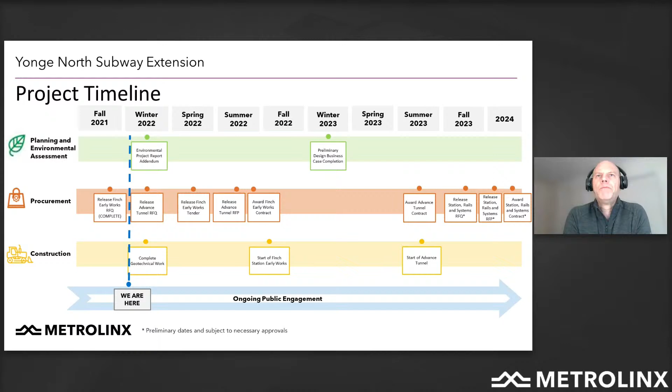Thank you, Stephen. First, just a recap of what an environmental assessment is, especially for those who weren't able to tune in to our first virtual open house or the second one last week. An environmental assessment is a process to identify environmental effects that a proposed project may have on the environment. We complete environmental assessments ahead of construction to identify potential effects and ways we can address them during and after construction, and we document all of this work in an environmental project report, or an addendum, as is the case for the Yonge North Subway Extension.

We've been working on our addendum for Yonge North Subway Extension for a number of months now, and we're very excited to have it available for public review. Please, I encourage you to review it. The addendum is available on our website along with comment submission forms. At the first open house, we presented an overview of the findings for all environmental topics. At the second one, we looked at the tunneled segment of the project, and today we'll take a closer look at a handful of topics for the surface segment assessment.

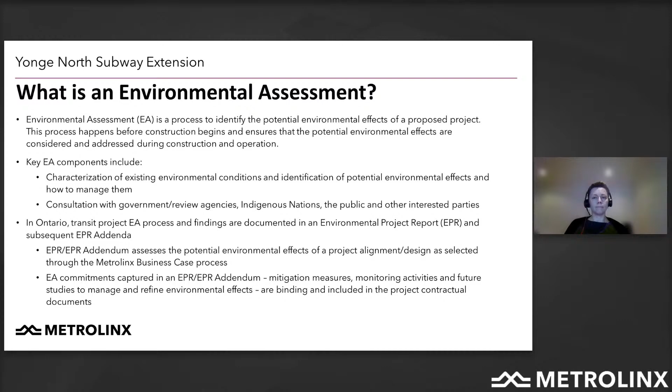Our addendum looked at all components of the segment, which include the surface tracks themselves, Bridge Station, associated bus facilities, High Tech Station, one traction power substation located at the train storage facility, and the train storage facility itself. For the next few slides, we'll touch on Bridge Station, High Tech Station, and the train storage facility.

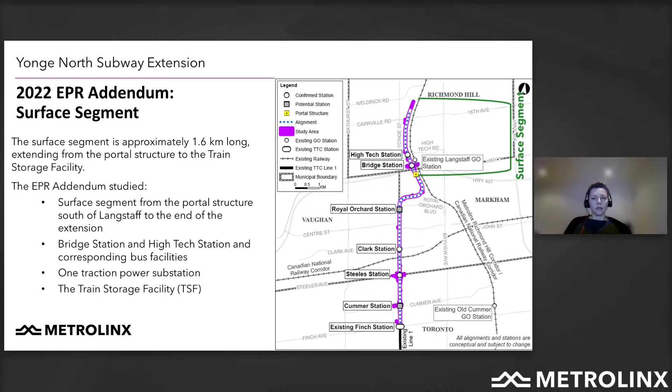Bridge Station is proposed to be located alongside the existing CN Rail corridor between Highway 407 and Highway 7. It will be a new transit hub that will open up new travel possibilities in York Region and beyond. The hub will bring convenient transit access to the Richmond Hill Centre and Langstaff Gateway development areas, which is expected to reduce traffic congestion as these communities grow.

You can see on the map, the hub will also offer fast and convenient transfers to five existing and future regional transit lines. These include Viva Yonge Street Rapidway, Viva Highway 7 Rapidway, Highway 407 GO, Richmond Hill GO, and the future Highway 407 Transitway. Bridge Station is also one of the main drivers behind the Yonge North Subway Extension business case. It's a very important element in creating the network effect by bringing together multiple transit lines to give riders more options and enable easy transfers.

I also want to point out the placement of the station between two highways. Locating it here enables transit development on lands that are currently underutilized, which at the same time means that the space the station and the hub would have occupied elsewhere can be used to support other non-transit uses and development.

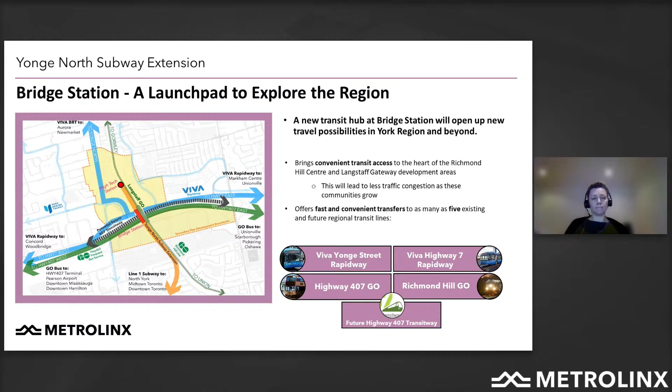High Tech Station is the last station along the Yonge North Subway Extension, and it will serve future communities envisioned within the Richmond Hill Center area, putting the subway within walking distance of an estimated 2,300 jobs and 5,500 people, more than half of the residents expected to live in this designated urban growth centre by 2041. The station will be built at surface, like the bridge station, located partially under the bridge along High Tech Road, which spans the CN Rail corridor.

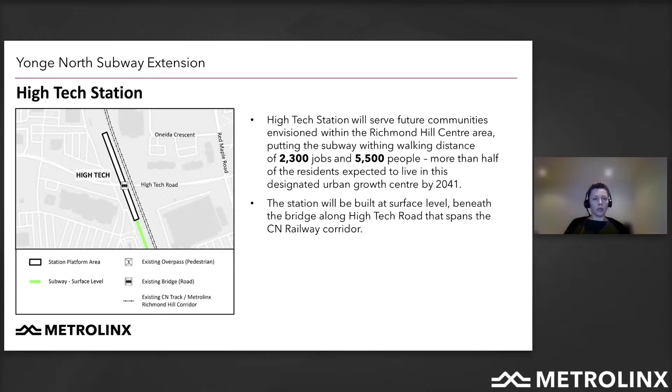Train storage facility for the Yonge North Subway Extension is proposed to be built partially alongside and within the existing CN Railway lands. Placing it at the surface is standard practice and is critical to stay within the $5.6 billion funding envelope for the project. Cities like Vancouver, Chicago, and New York all have ground-level train storage facilities that successfully integrate into surrounding areas and meet the needs of their respective transit networks.

This change brings the proposal in line with our local TTC's five subway train storage or maintenance facilities, which are all above ground.

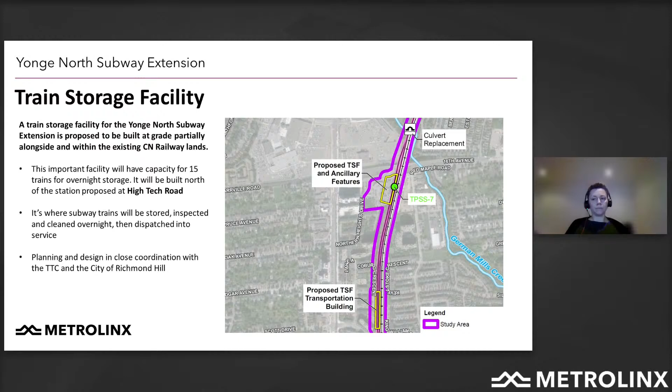Now switching gears to the addendum findings with respect to the surface segment. At tonight's open house, we will focus on noise and vibration, natural environment, and air quality, which are key areas of environmental management on Metrolinx projects, and we wanted to spend a bit of time discussing these for the surface segment.

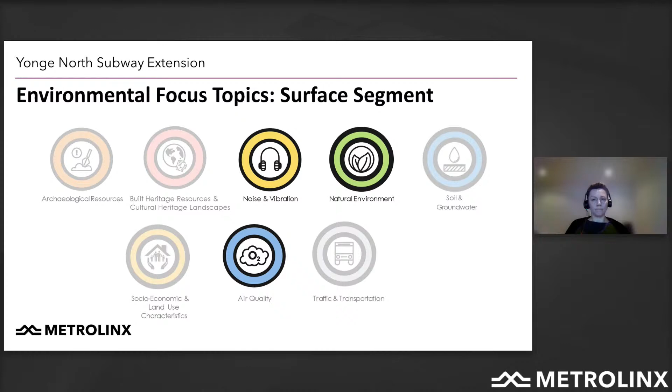Noise and vibration is up first, and for those who were not able to tune in to last week's virtual open house event, I just wanted to outline Metrolinx's general approach to noise and vibration management.

We start with the environmental assessment studies, which identify recommended mitigation and monitoring. These studies also outline noise and vibration limits that the project will adhere to. Together, these are binding commitments, which are then included in the project contract documents.

Detailed design is developed based on these commitments, and contractors also develop noise and vibration management plans based on these commitments, which Metrolinx then reviews and approves prior to construction start. During construction, noise and vibration levels are monitored to confirm effectiveness of mitigation measures and adjust the approach as required. That is it for the general overview of our approach.

In the next few slides, we'll cover addendum findings with respect to noise and vibration limits and mitigation measures in more detail. Next slide, please.

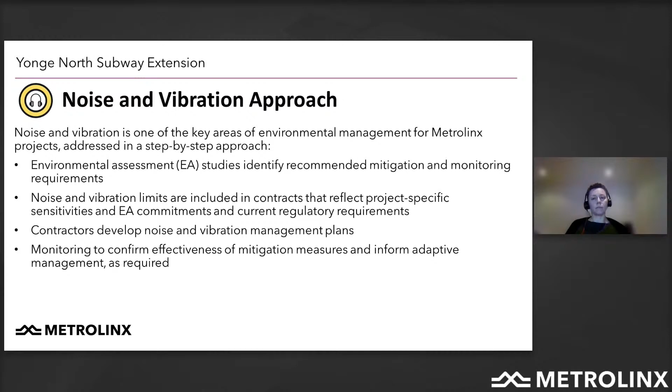Subway trains can also produce ground-borne noise. This is sound that results from train-induced vibration that travels through the ground and causes building structures to vibrate, which can be heard. While we did look at ground-borne noise for the surface segment, it's much less of a factor here because the surface subway tracks are ballasted, and ballast does not have the potential to generate as much ground-borne noise as the underground tunnel structures, which we covered more extensively at the open house last week. Ballast is made of crushed stone and is essentially what supports rails and ties.

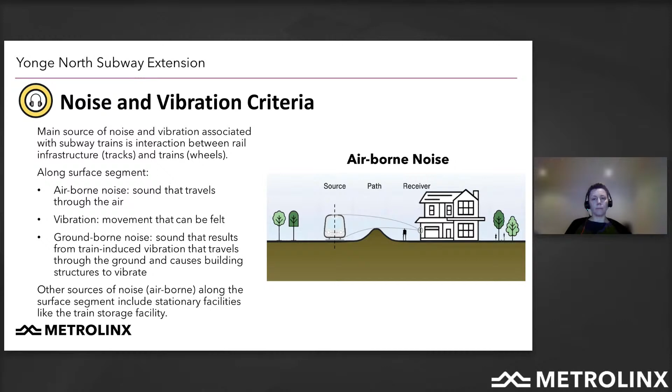Next slide, please. Now let's talk about the noise and vibration criteria for project operations along the surface segment. The noise and vibration criteria for the trains are defined in provincial protocols. For the surface segment, we followed the limits developed by the Ministry of the Environment, which is now known as the Ministry of the Environment, Conservation and Parks, and the TTC, and the Ministry of the Environment and GO Transit.

For ground-borne noise, there is no provincial criteria, so those were adopted from the United States Federal Transit Administration. This is typical practice that's been used on many recent transit projects across North America, and is accepted by the Ministry of the Environment, Conservation and Parks. The non-mobile sources of noise, like the train storage facilities, stations, traction power substations, and bus terminal, were assessed in accordance with the provincial guidelines developed by the Ministry of the Environment. All of these guidelines and noise and vibration limits can be found in our addendum report.

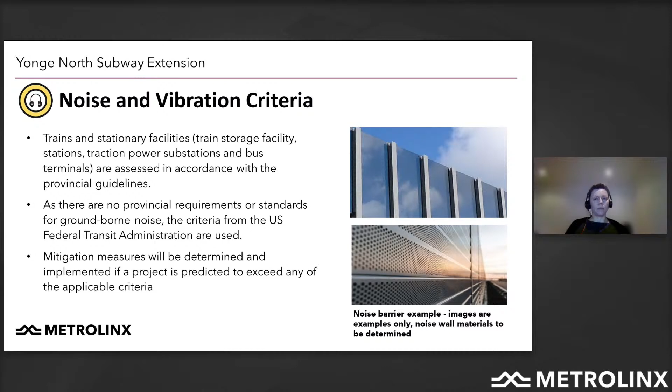First, I would like to talk about our noise and vibration findings with respect to trains. Revenue train operations for the surface segment are between the tunnel portal, so south of Langstaff Road East, and High-Tech station. Beyond High-Tech, trains travel to the train storage facility, which is assessed separately, and we will cover it in the next slide.

Between the tunnel portal and High-Tech station, our study predicts a 1 to 2 decibel increase, with one of the assessed locations showing no changes. I'd like to stress that our assessment was comprehensive, and this 1 to 2 decibel value reflects all sound sources, including the heavy rail operations along the existing CN tracks. Taken alone, electric subway trains are substantially quieter than the freight trains you may see running along CN tracks, and quieter than the overall existing sound levels without the subway trains.

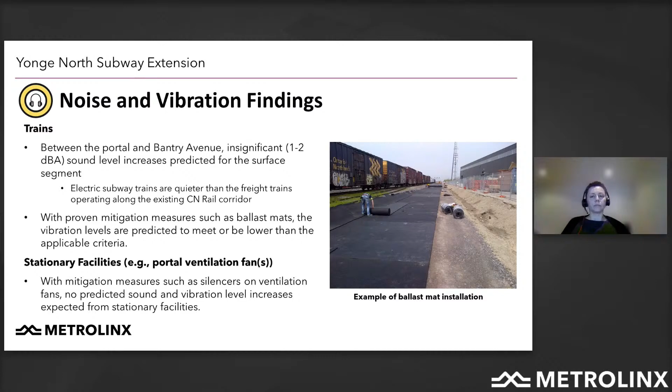Now I'd like to cover the train storage facility. With proven mitigation measures, the train storage facility is expected to meet or be below the applicable noise and vibration limits. Trains generally will move slowly along the tracks within the facility, and there will not be many of them, as the facility's capacity is for 15 trains.

We identified an approximately 5.5 meter tall sound absorbing noise barrier that would extend along the west side of the facility from about north of Bantry to about south of 16th Avenue. We anticipate that this barrier will effectively reduce noise from the train storage facility operations.

In addition to the tracks, the train storage facility will have special track work, like track crossings, to let trains switch tracks. This special track work can contribute to noise and vibration, and to reduce noise and vibration as trains travel over special track work, we identified solutions like movable point frogs.

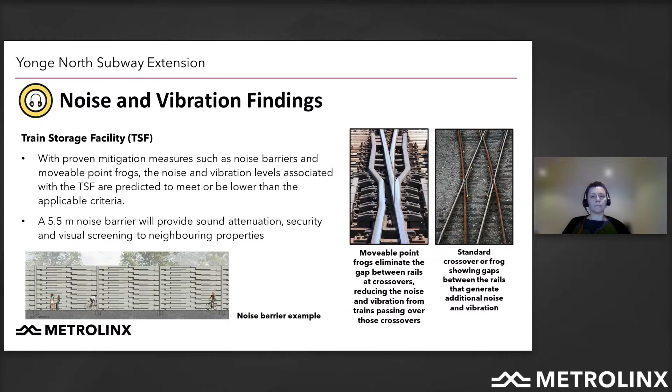Moving on to construction noise and vibration. Again, a recap of our approach to managing construction noise and vibration for those who were not able to tune into last week's open house. To reduce nuisance effects of construction noise and vibration, we start our planning before construction. We establish a comprehensive communications program to inform local communities about the scope of work, schedule, noise and vibration management strategies, and of course, communication and complaint resolution approach.

The contractors also develop noise and vibration management plans that look at the noise and vibration levels that may be achieved and identify ways to reduce them if we expect any exceedances, and outline monitoring approaches. The last step before construction starts is, of course, to implement all necessary mitigation measures.

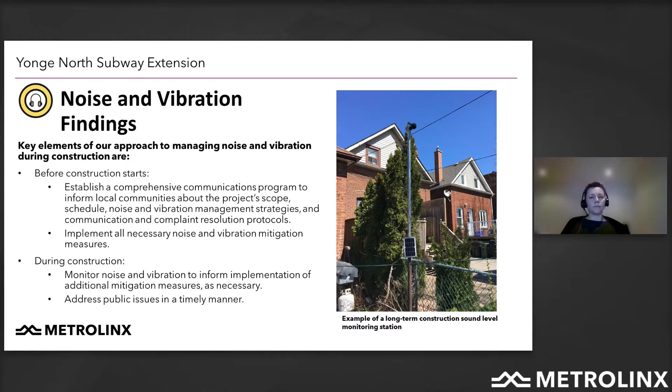Ultimately, the mitigation measures selected are tailored to each project and each individual construction area. Continuous noise and vibration monitoring lets us confirm how effective mitigation measures are and adjust our mitigation approach as needed to keep noise and vibration down.

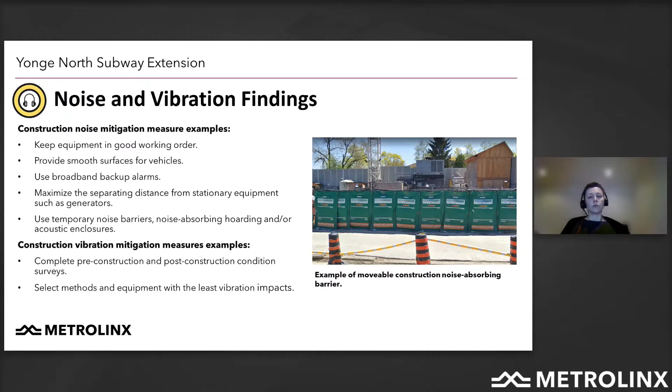Sure thing, Maria, and thank you very much. Good evening, everyone. I'm going to be spending a few minutes talking about a couple facets of the YNSE project, specifically our approach to natural environment impacts as well as air quality impacts.

I'll start off my remarks by noting that Metrolinx has a strong desire to protect surface water, plant communities, and wildlife for all of its projects. We provide a framework for this protection through the environmental assessment process, as Maria mentioned during her opening remarks. Similar to noise and vibration and other technical specialties as we refer to them, the EA process identifies mitigation measures and monitoring commitments that are indeed binding for Metrolinx and its contractors, which hopefully provides some level of reassurance to the community that we can be a trusted partner to deliver what we say we will do.

These commitments are made enforceable through our contractors, through commitments in contract language and through the project agreement. We actually empower the contractors themselves, having boots on the ground, to be a key partner in the development of mitigation measures for the natural environment by helping develop targeted and specific mitigation plans. We often require specific plans for various facets of the environment, including one for natural environment, which will hopefully provide a holistic approach to managing the environmental component of the project.

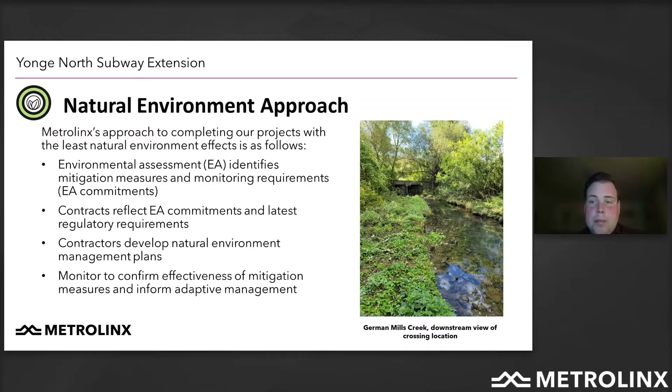Right now, what I'd like to do is summarize some of the key findings from the natural environmental investigation. This is really just intended to be a somewhat high-level summary at this time, and I would encourage people who are interested in these matters to refer to the complete natural environment existing conditions and impact assessment report that is available on the Metrolinx Engage website.

As you saw in my last slide, we are looking at potential impacts to German Mills Creek. This is a water course that is within an area regulated by the Toronto and Region Conservation Authority, which goes by the acronym TRCA. Also within the at-grade segment that we're talking about as part of today's virtual open house, we also have woodlots as well as other features.

As part of our assessment, we did look at both features through secondary source data that was supplemented and verified through field investigations, and determined that these features, while important to the community and certainly providing value, have been heavily disturbed and modified through human activity, which is actually par for the course, typically within the Greater Toronto Area.

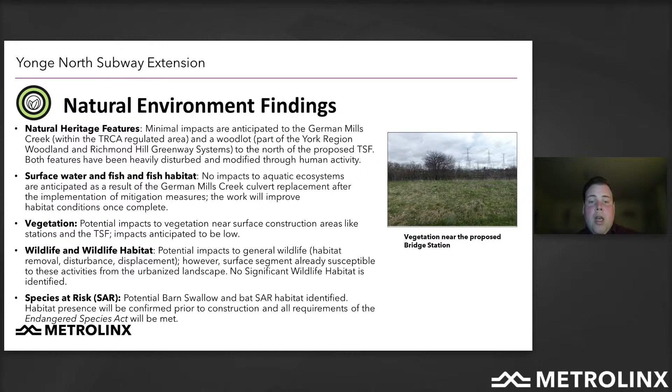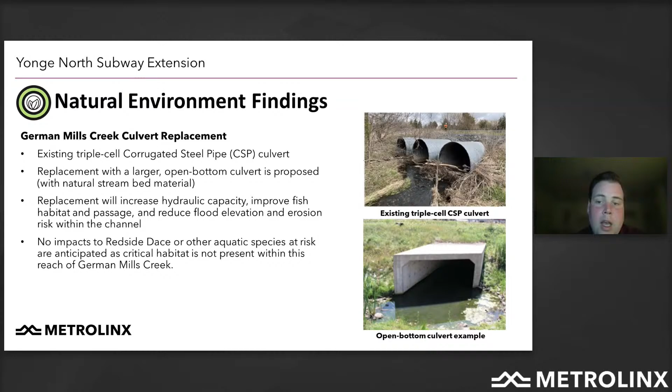As I noted when talking about the need to make use of the existing CN rail corridor, we do treat avoidance as a much preferred approach to environmental management as opposed to mitigation. That includes minimizing our construction footprints to the extent feasible. When those construction footprints still influence or impact the natural environment, we apply additional mitigation measures.

For vegetation that must be removed or where avoidance is not possible, the actual vegetation removals themselves will proceed in accordance with the Metrolinx vegetation guideline. In cases where we have disturbed areas that may extend a somewhat significant time, we'll be providing temporary restoration and stabilization to make sure those areas retain a good state and that we are remaining good stewards to the environment.

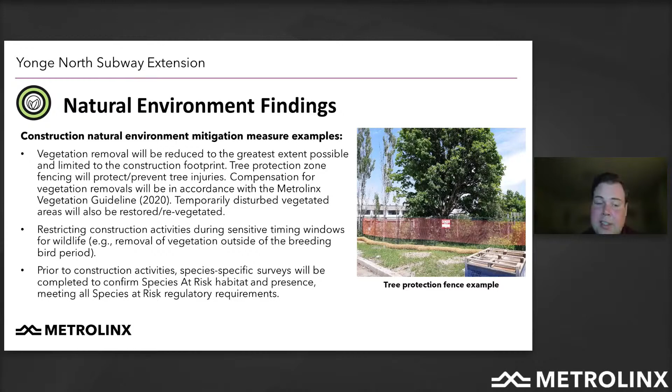I'd now like to shift my remarks to a brief overview of how air quality was considered within the environmental assessment for the Yonge North Subway extension. Just like noise and vibration, as well as the natural environment, what the EA study did was identify recommended mitigation monitoring requirements based on an assessment of potential impacts.

Just like with natural environment, the mitigation measures contained within the environmental project report addendum are binding and will be carried forward into our contracts and project agreements. Metrolinx will be working with the contractors and will be reviewing the air quality management plans that will provide the contractors site-specific ways to reduce air quality impacts during construction.

This would include measures such as minimizing or restricting idling, shifting equipment that has the potential to generate air quality impacts away from sensitive receptors, as well as other measures to provide a more holistic consideration of air quality impacts during the construction process. Just like with all mitigation and monitoring measures identified through the environmental assessment, there will be regular monitoring to ensure they are effective in performing as intended.

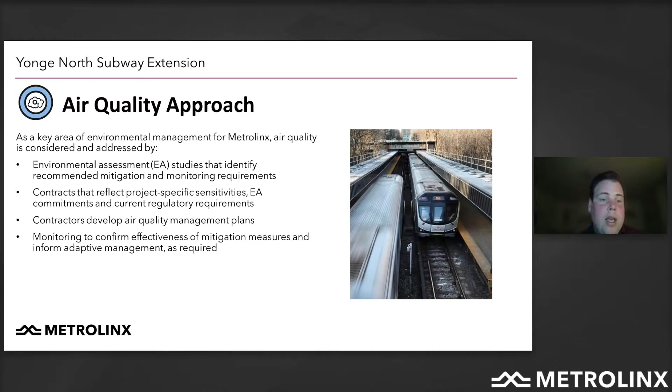What this slide is intended to do is to present some key findings from the air quality impact assessment that was done. Apologies for sounding like a broken record, but this is not a complete summary, and we do encourage you to refer to the full report if you are truly interested in these matters or wish to know the details.

But if I were to attempt to summarize our findings, I would note that the existing air quality is characteristic of an urbanized area. That means there are certain exceedances of certain air quality parameters at the moment, and those are largely a result of existing transportation uses in the area, things like cars, trains, etc. Because the subways are electric, the YNSE project as a whole is predicted to improve air quality, primarily by taking cars off the road. As we see a shift away from the use of personal vehicles, we will have an overall reduction of greenhouse gas emissions.

For the static components of Metrolinx's infrastructure, things like the train storage facility, its operation is not expected to result in significant air quality impacts. The activities completed in the rail and car shops would be the types of cleaning and daily maintenance that Maria described, needed to keep the subway in a good state of repair. Think of cleaning, replacing upholstery, light bulbs, those types of activities.

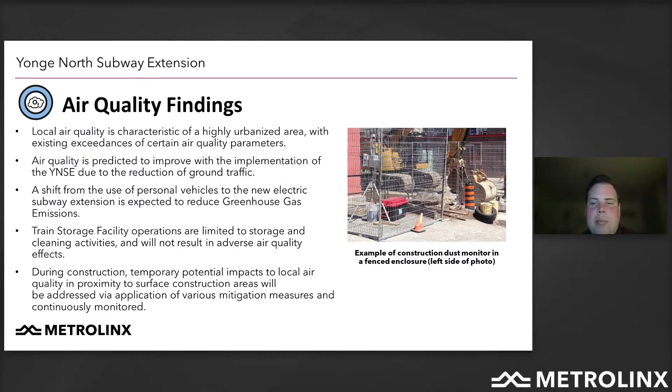This slide talks about some of the more specific ways air quality will be managed during construction. Just like with other facets of the environment, detailed management plans will be developed and implemented prior to construction. One of the specific air quality impacts that we often find happens as a result of construction is the generation of dust, and one of the most effective ways to reduce those impacts is through regular watering. Applying water reduces the potential for particulates to be drawn up into the atmosphere, and that's just one example of a very simple, cost-effective measure that can be done to improve air quality during the construction phase.

Similarly, any stockpiles will be covered to make sure that wind does not generate particulates that could impact people's enjoyment of their properties. Similar to noise and other measures, we will be including requirements to limit idling to the minimum amount necessary, as well as making sure that any equipment with the potential to generate air quality impacts is located away from sensitive receptors to the degree possible.

Also, where possible, we'll be looking to utilize equipment that has lower emissions and meets current air quality standards. The Ministry of the Environment, Conservation and Parks provides general guidance and requirements for construction equipment that will be specified in the contract. Just like with all mitigation measures, we will be consistently monitoring what's happening on our construction sites and making adjustments where necessary.

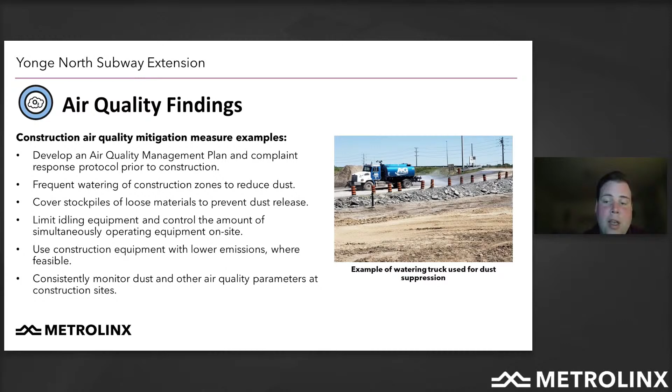What I'd like to do as part of my remarks right now is tie into the current status of the EPR addendum. As Stephen mentioned in his introductory remarks, we are in the middle of a public review period at the moment. This public review period kicked off with the notice of the EPR addendum on February 10th. Right now, the public review comment is anticipated to close on March 14th, at which time we'll update the environmental project report addendum to reflect the feedback we heard during the public review period. We will also be issuing responses to any comments or feedback received, and presenting to the Minister of Environment, Conservation and Parks with the finalized addendum, which will form the basis for the Minister's decision on moving the project to the next phase.

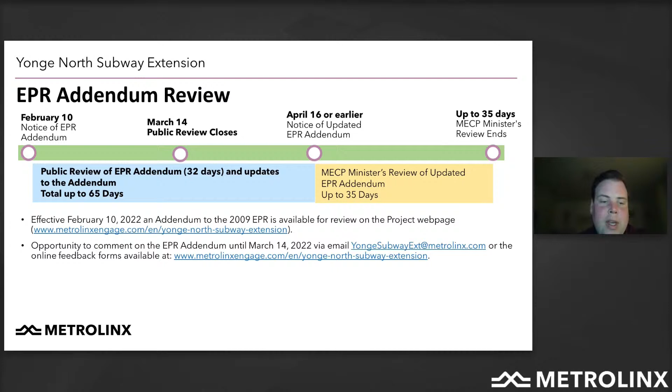At the bottom of the slide here are several links on where you could provide your feedback, and as part of our work, we of course encourage you to do so. All comments received during the public comment period will receive a response from the project team, and we look forward to working with you to resolve any issues or concerns you may have.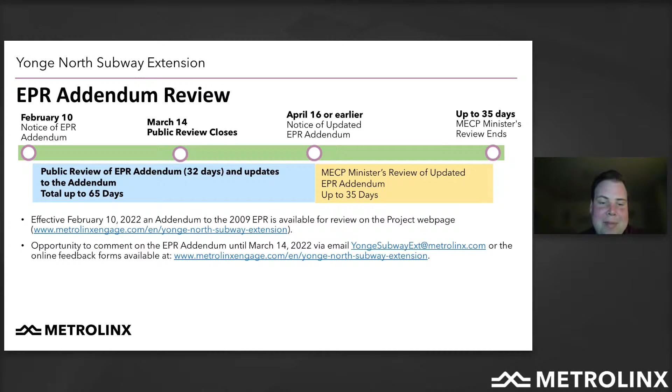As a final concluding remark, we just wanted to again thank you for taking the time to learn more about the project as part of today's discussion. We will now be moving into more of a question and answer period, where we will be hearing some of your remarks and hopefully providing some answers to any questions you may have. There will be an additional open house occurring on March 10th, and we do encourage you to participate in those discussions as well. Just like in this case, any questions about the project can be submitted through the Ask a Question forum on the Metrolinx Engage website. You'll see here some additional contact information for how you can get in touch with the project team.